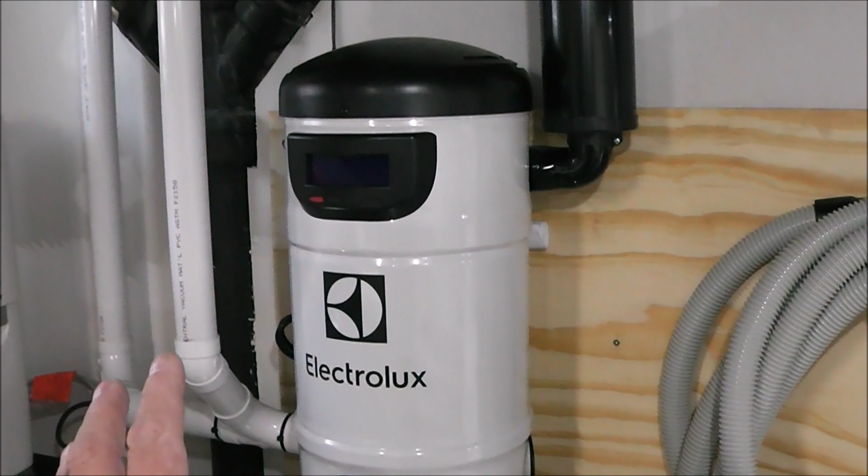laundry room. So what I've done is our vacuum cleaner just crapped out, so I just installed this last week, and what that prompted me to do is I had to drywall this wall here, and I also drywalled this wall here. So things are kind of torn up in here right now, but let me show you what we're going to be working on and what this has prompted this project to do.

So this countertop right here came out of my mom's house. It used to be a center island bar countertop. I want to build a rolling work surface, or like a work table, that my wife can use to fold laundry, and she can also use it to do her crafts. And I've got some drawers that I picked up from a college that I did some work at. Let me show you those.

Here are the drawers. You can see I got a few of them. I got some junk out here I've been bringing out too from doing the drywall. Look at the drawer construction. So they're constructed well, and I believe it's going to be a maple hardwood. So yeah, I think this will be kind of neat and it'll look good.

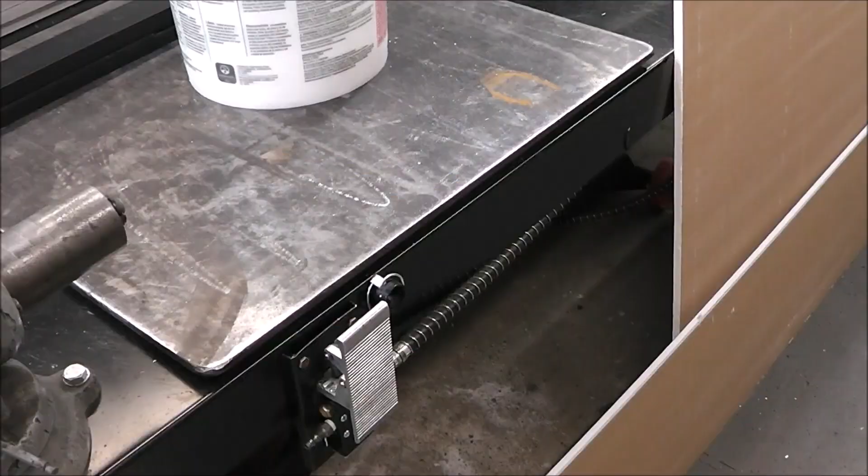So I think I'll put maybe a row of 3 drawers across the front, and it'll have a metal frame. So I'll probably make the work surface about the height of my table here. We're gonna have to make it so that it is not wider than this opening here. That way, if we ever had to get that out of that room, we could take the top off and just wheel everything through.

So now that you guys kind of got an idea of what we're building and how we're going to build it, now I want to show you how I arrive at how I'm going to go about it. If this part doesn't interest you, just go ahead and skip ahead to when you see me cutting or welding or whatever. But for some of you guys that want to know the thought process of where to start building it, this is what I'm going to talk about here.

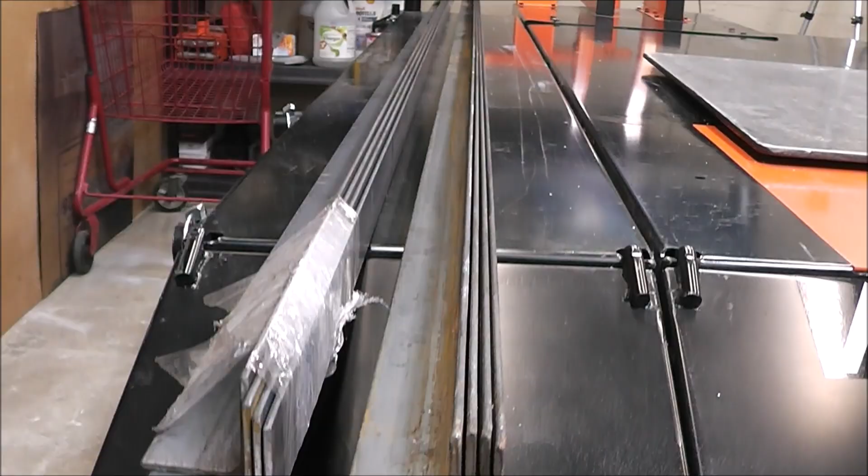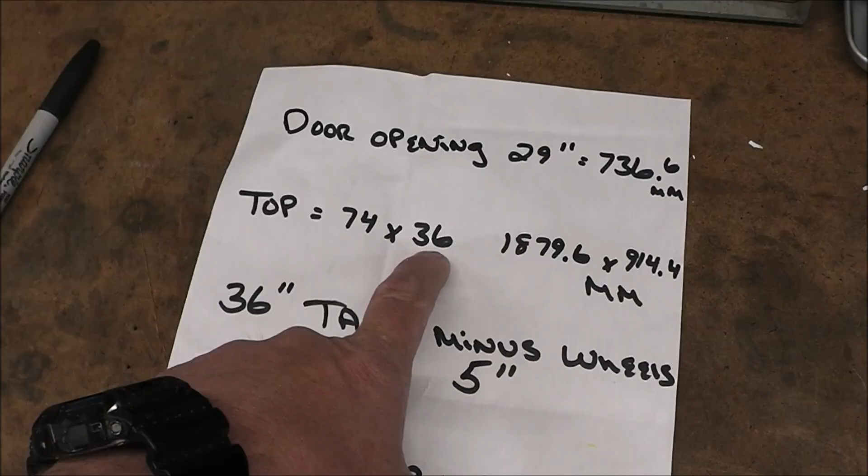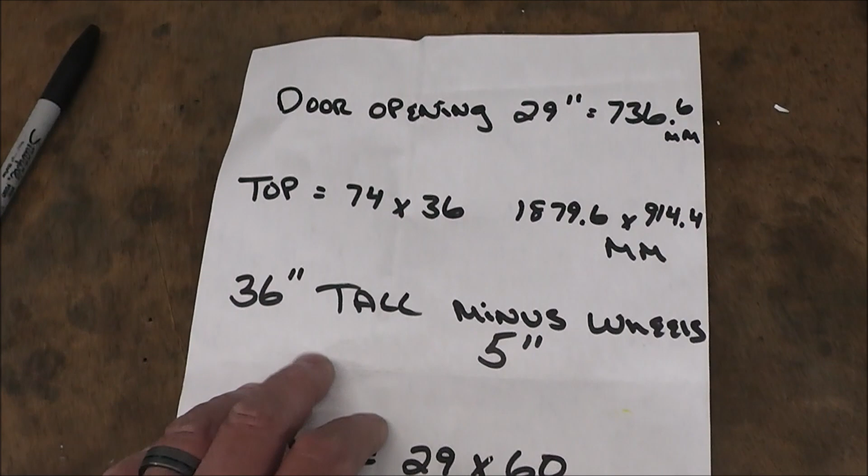This is what we're going to be building our frame out of. It is 1.5 inch angle, and it's 1/8 inch thick. This material comes from the factory in 20-foot lengths, but so it's easier to transport, I have them chop this in half. So my top is 36 inches wide, but my metal frame below it is going to be 29. So overall, that's a difference of 7 inches, which means I'm going to have an overhang of 3.5 inches on each side. Now that covers our width, but for length, I'm going to do 60 inches.

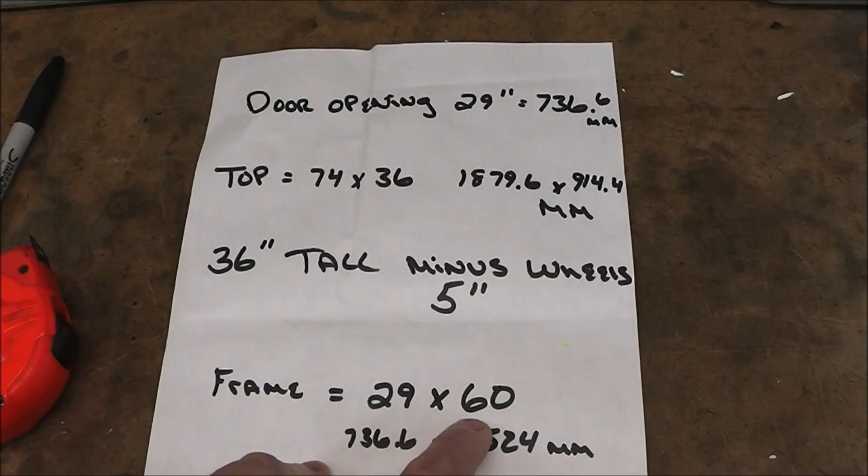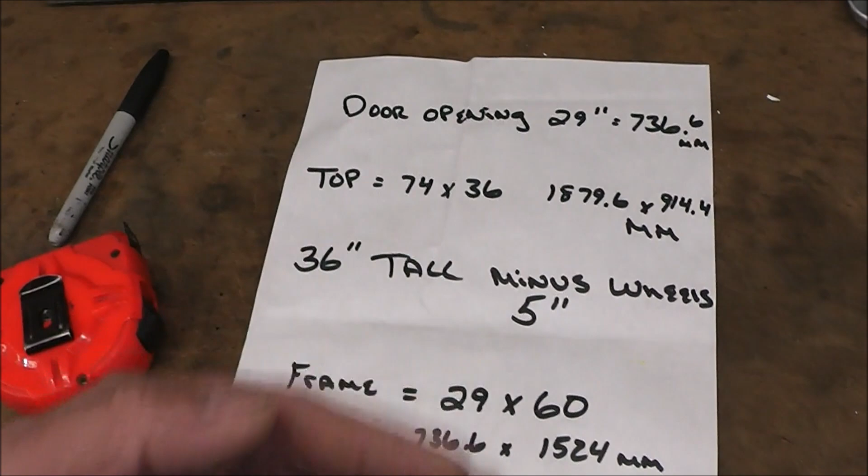Why'd I go with 60 and not that 7-inch difference? I'll show you. Each of these pieces are 10 feet long, so half of that is 5 feet. 5 feet is also 60 inches. So it'll just minimize the amount of waste. And that'll give me overall, from 74 to 60, 14 inches. And I might put that 14 inches all on one side, so it's hung over, so you could pull a stool up to it, and your legs would go right up underneath it without bumping. So our frame we're going to build at 29 by 60.

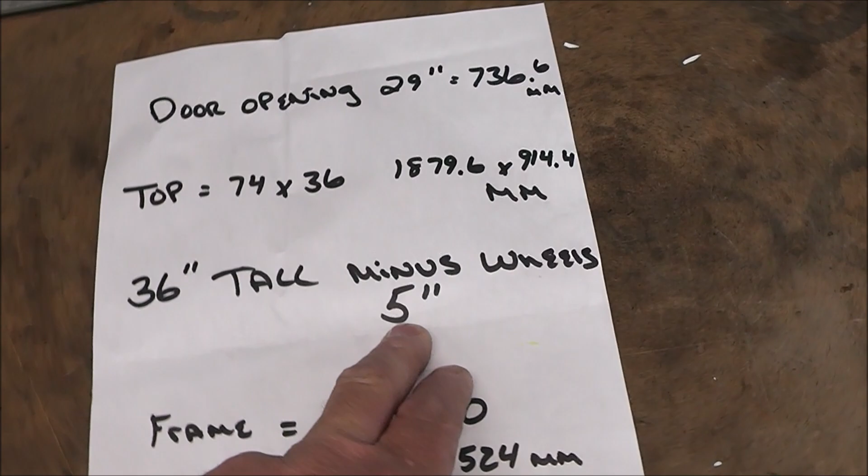I want it 36 inches tall off the floor, but we also got to subtract for our wheels, which is about 5 inches. And you can see that's what I have over here on this workbench. I've just got all wheels, I can roll it around. Those measure 5 inches. So that adds another 5 inches to your height. Then the next thing I do is draw myself out a little sketch. That way I can visually see what I'm building and how many pieces I need to build.

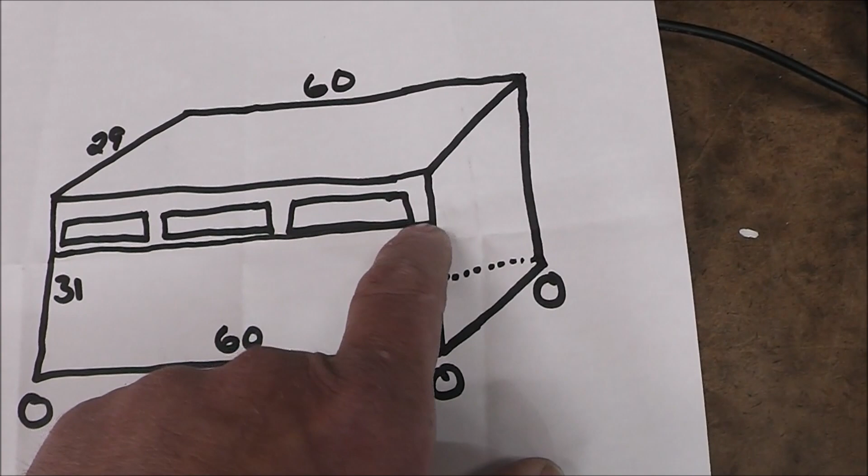So these simulate the drawers that we talked about, and it's also going to need a piece coming across underneath the drawers. Recognize this right here? That is those drawers that I was just showing you. So I use this all the time. You can see this is my catch-all. This is where I'll keep all my supplies.

We'll start right off. I know I need 1, 2, 3, 4, that's the back one, plus 1 under here, so there's 5. So we'll cut 5 at 60 right off. Taking just a few extra minutes in the very beginning to lay things out and plan it out like this is going to save you a little bit of money on the other end too, because you're not going to have as much waste. If you have a bunch of 1-foot pieces left over, you're probably not going to have a whole lot of use for that. So I tried to maximize the material that I have and minimize the number of cuts.

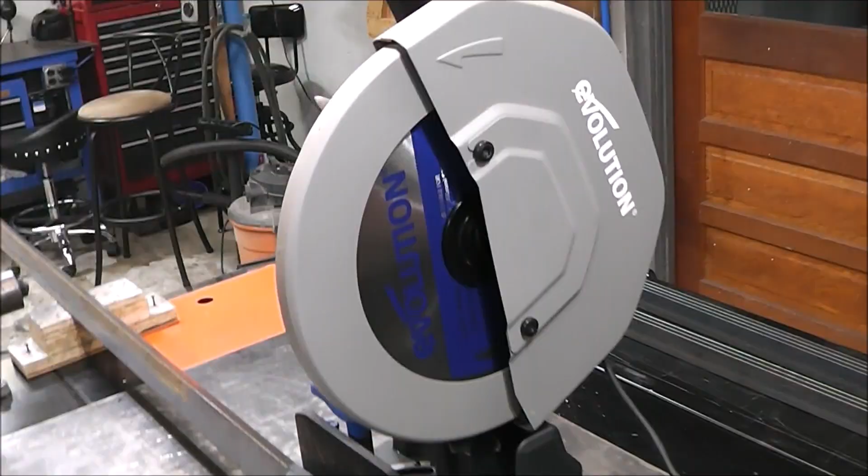So let's get going. For this, I'm going to be using my 15-inch Evolution. It is model S380 CPS. I know you guys always ask, so I wanted to show it to you.

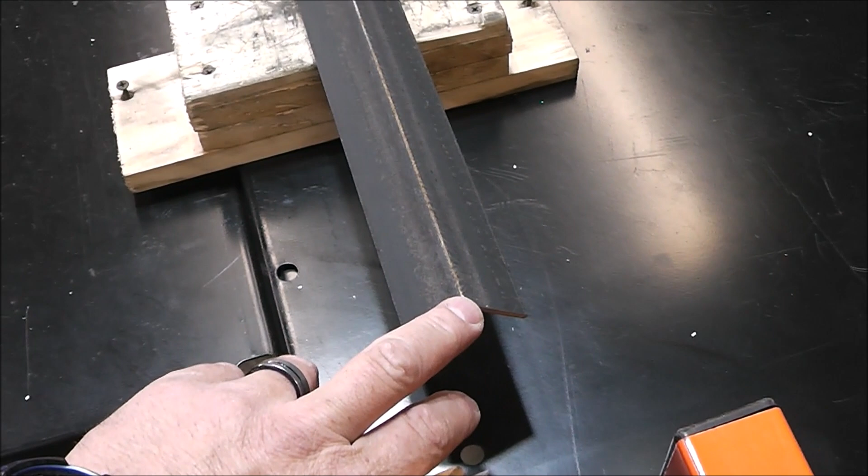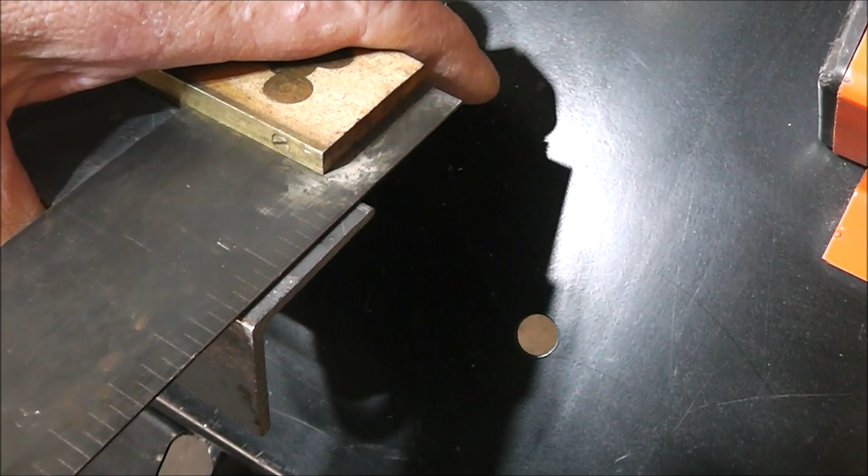But the one little tip, now remember I said they cut these to 10 feet. They originally come in a 20-foot length, this size. So don't take for granted that because the metal shop cut it for you, that they actually did a good job. You want to verify that. I've actually seen where the metal shop cuts it and the cut is crooked. So here they did a good job, but you don't want to take it for granted, measure out your stuff, make your cut, and then realize that they had made a crooked cut on this end. Now your piece won't be long enough. So just double check everything before you start. It'll save you a lot of aggravation potentially in the end.

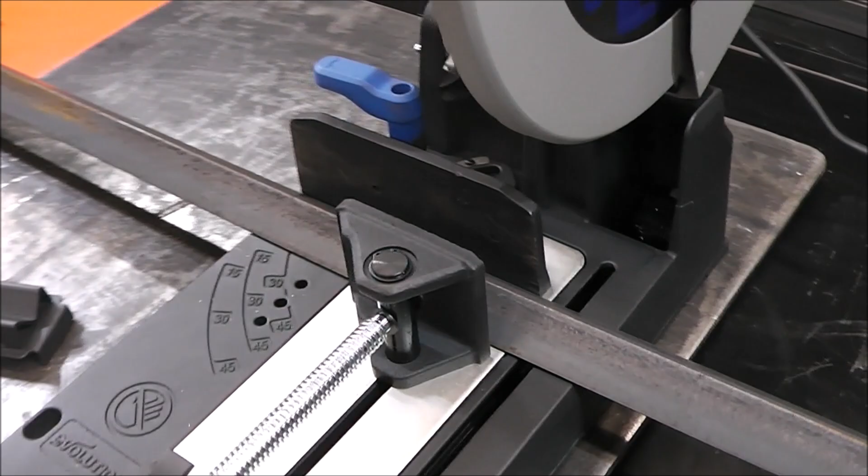I personally like to use these silver streaks. They didn't have these when I started metal fabrication. All we used was a soapstone, but these make it real nice because it works like a mechanical pencil. You pull this cap off on the end, you can spin it around, sharpen your pencil. It just works really good.

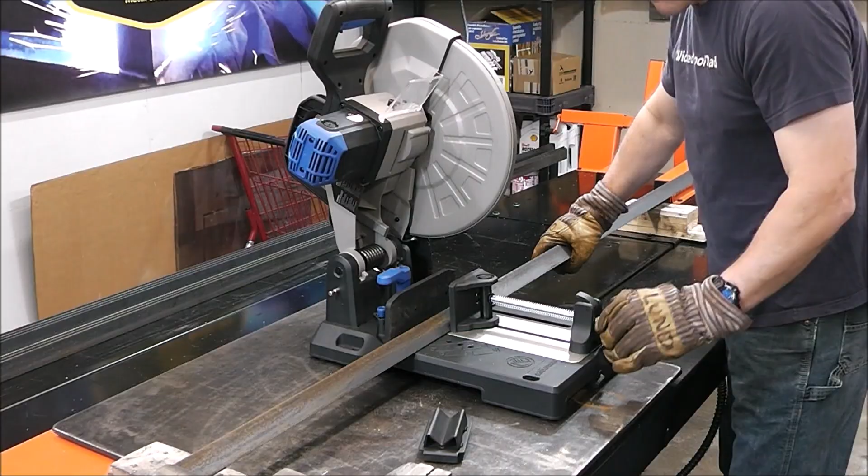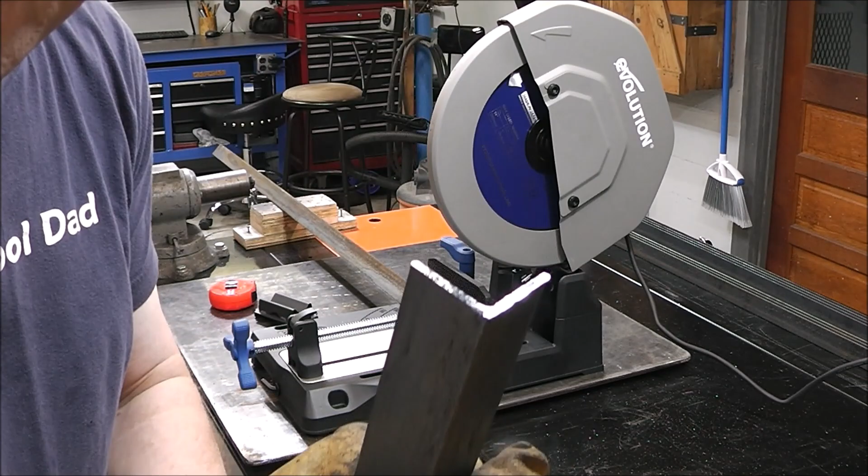And check that out, guys. Burr free. No heat in it whatsoever. That's why I love this tool so much. And now without moving anything, we can come right over to this side and measure out 5 feet or 60 inches again. That easy. Loosen up our clamp, slide it over, check it to make sure that our blade is going to just cut right at that line, snug her down. That easy.

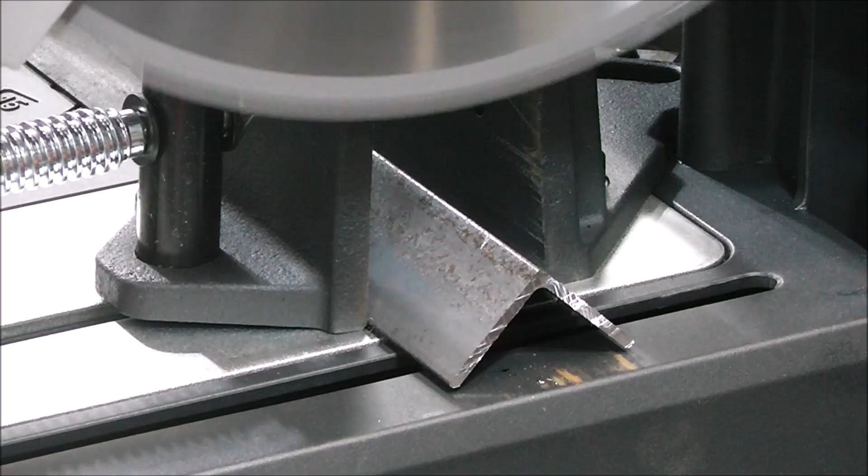Check that out, guys. That's fresh off the saw and I grabbed it by hand. If you cut this with a grinder and a cutoff wheel, you wouldn't be able to do that. So that's the great part about this saw. Not only does it do a nice clean cut, it keeps the material cool. You don't have hot molten sparks flying through your shop and you lessen the chance of burning down your workshop. How you put the material in this saw actually matters as far as longevity of your blade.

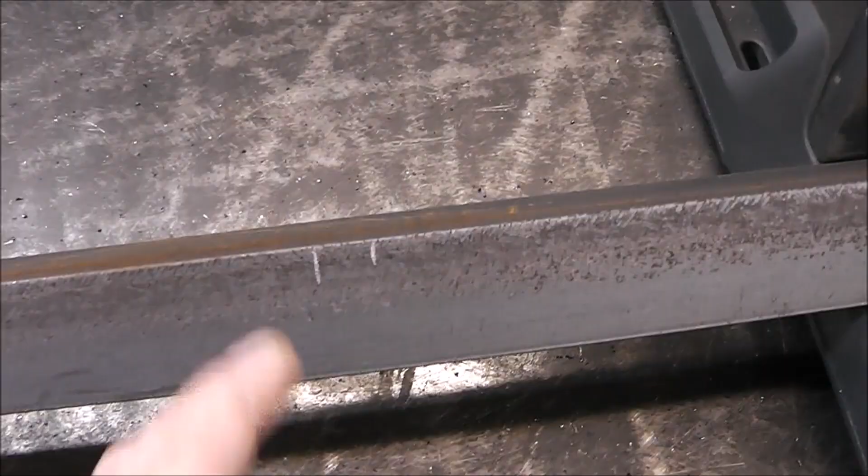So you can see my little marks right here. So from that mark it's 60 inches that way, and from that mark it's 60 inches that way. So the piece right here, that's the scrap. I'll give you a close-up on how I set that up.

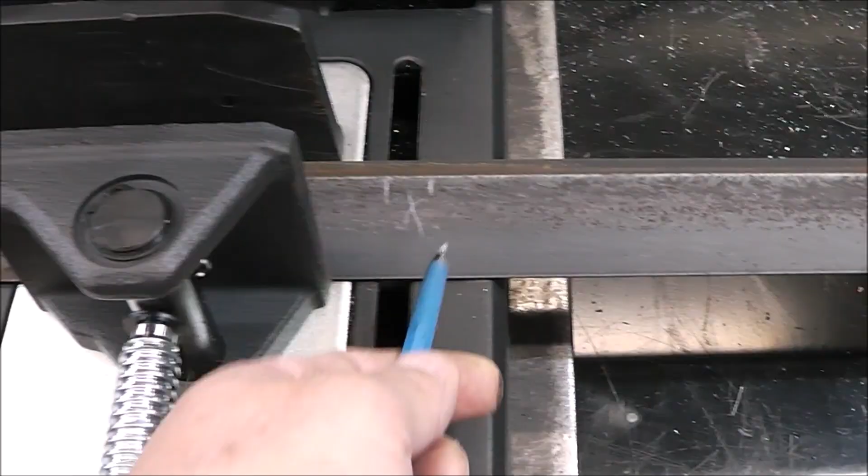Now you have to account for the kerf of the blade. Remember, this is the piece I'm keeping, so the blade needs to be on this side of the line, not that side of the line. So I want to keep just a little bit of this white line showing on that piece. Right there, that's what we want. Looking right down that blade, you see how we can just see that line? That's what we want.

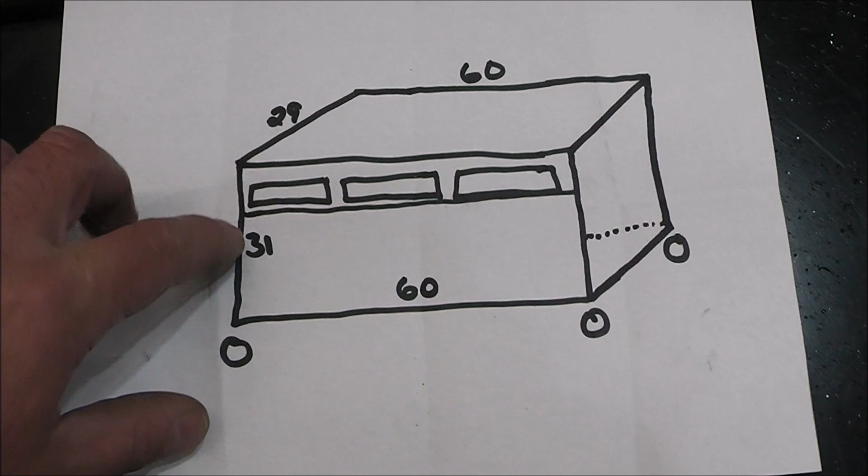So we got the 60s done. So now we need to work on the 31s. That's the height. So we got 1, 2.

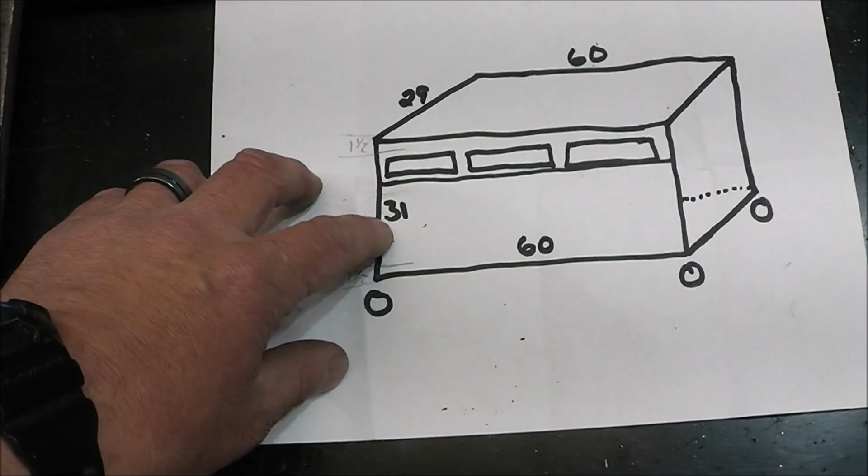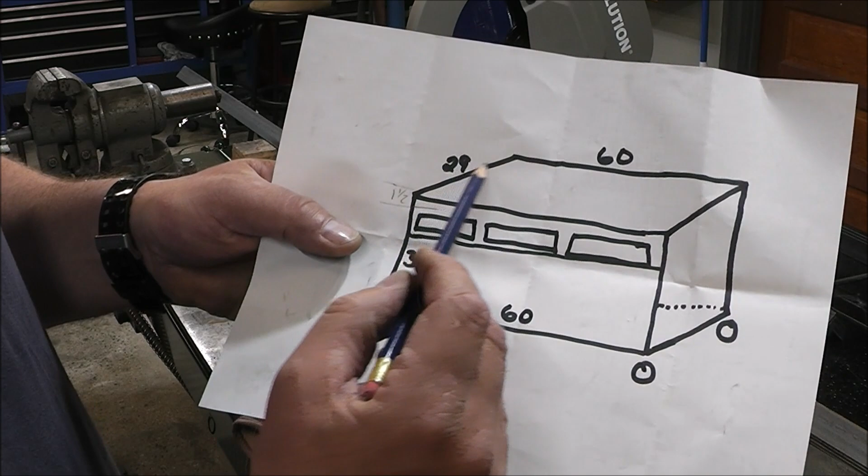That's what life's about. And now I'm going to be putting on the legs, and I'm going to build them the same way. I'm going to run the corner piece right up inside so it overhangs it, and then for the inside I'll run it to the inside, something like that. So we're going to want to make this piece 31 inches. So now I got all 4 of those cut, and now I'm going to start cutting the 29. We're going to need one there, there, and there. So we need 4 of those.

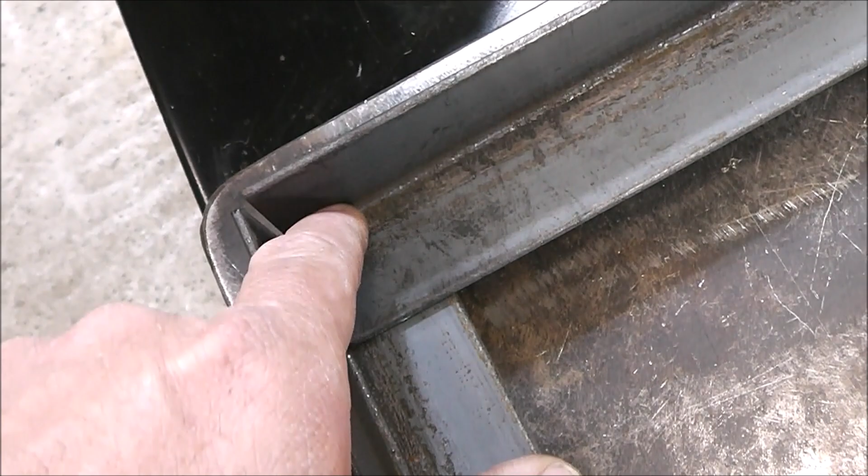So I've got our rough shape laid out. That's our 29, that's our 60. And now we're going to start putting this together and get ready to weld. Now, you can just clamp it together, right tight in the corner, weld it right here, here, and then come up. But you can see that leaves a little bit of a gap there. We could fill that, no problem, but it also gives me an opportunity to show you how to cope out the corners. It's called coping them out. Doesn't mean you have to do it for this, but I figured I'd show you another way of doing something. So I've got this piece lined up in the corner where it needs to be.

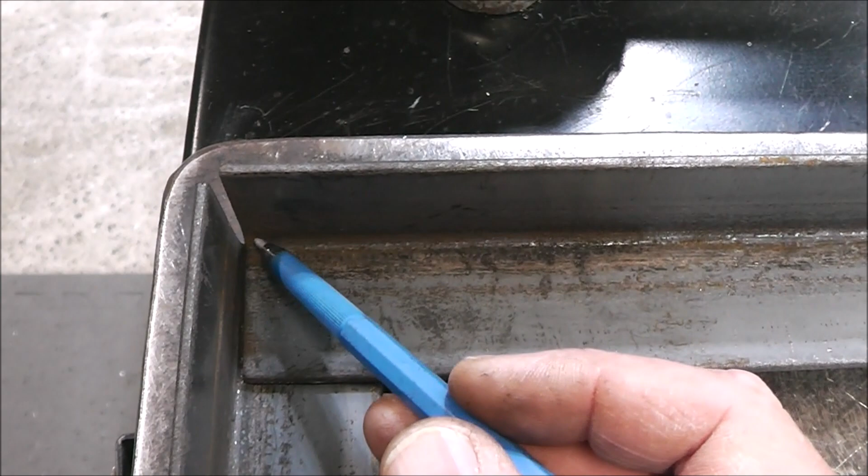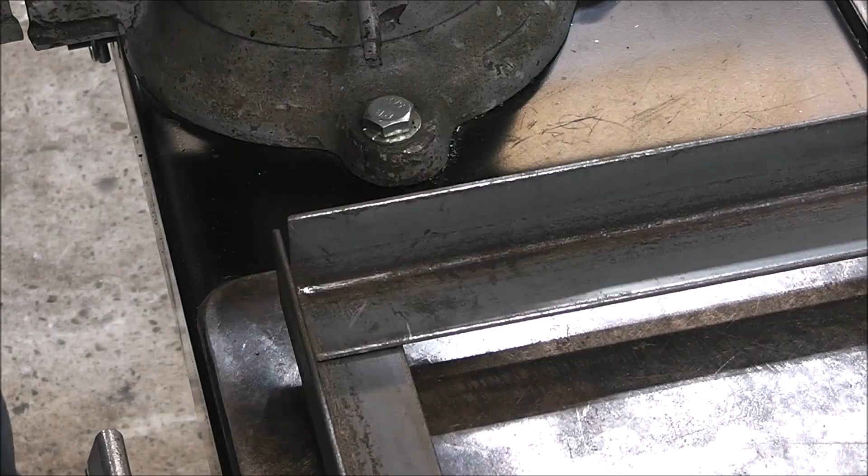This piece needs to come out. So it needs to have a line up here and then over, and this little square piece has to come out, and we're going to do that with an angle grinder. And to get that straight line, you can use pretty much any type of framing square, metal square, whatever trips your trigger, whatever gets you a straight line.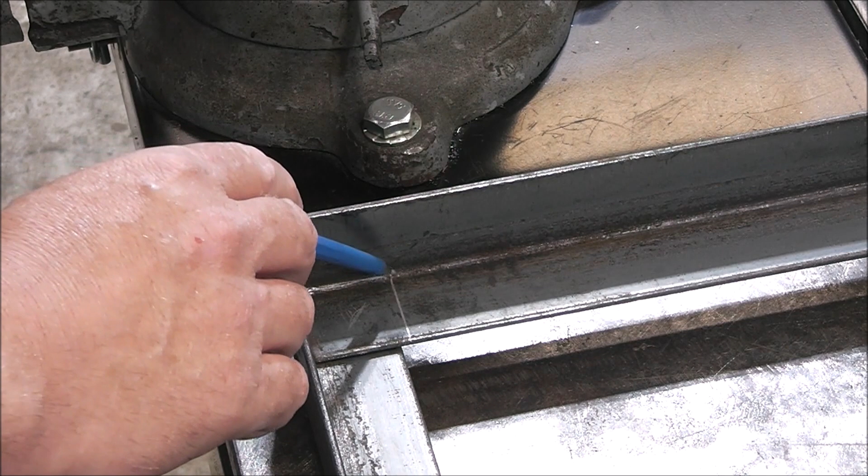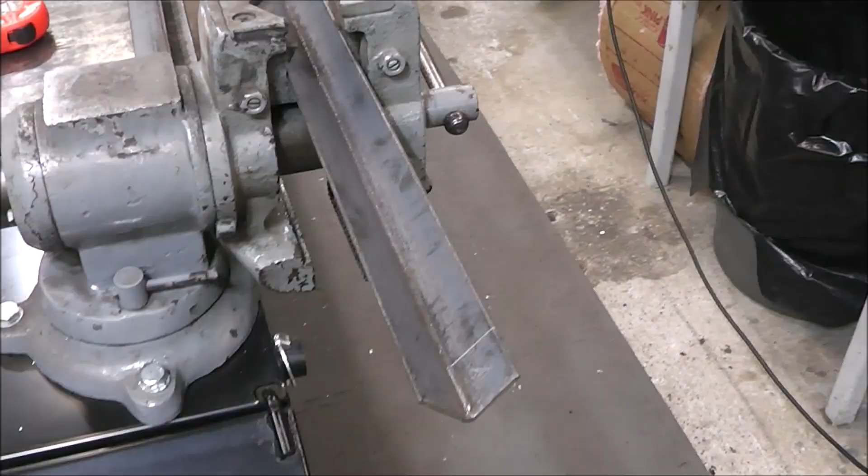And then we'll cut that out. You can even do that with a plasma cutter if you wanted. And we'll have to do that here, here, there, and there. So you'll have to do that 4 times, and then this will fit up nice. So I've got this chucked up into my vise so I can get to it real good. And you can see I got it all marked out.

And I'm going to use this right here, which is a metal cutting diamond cutoff disc.

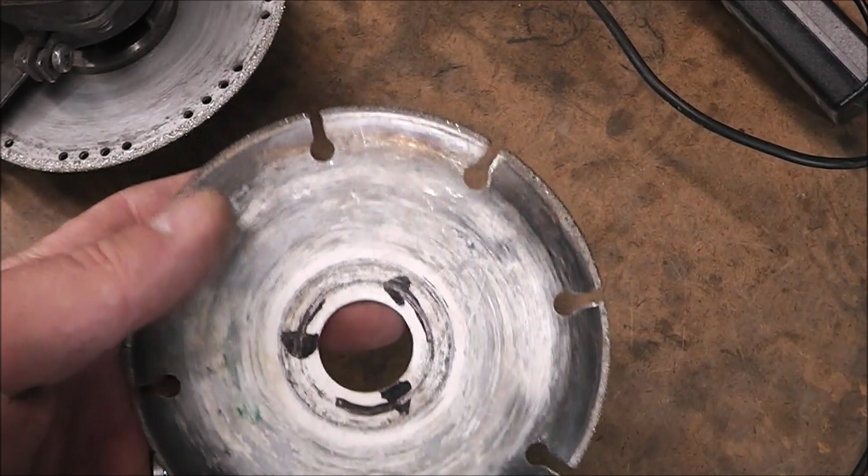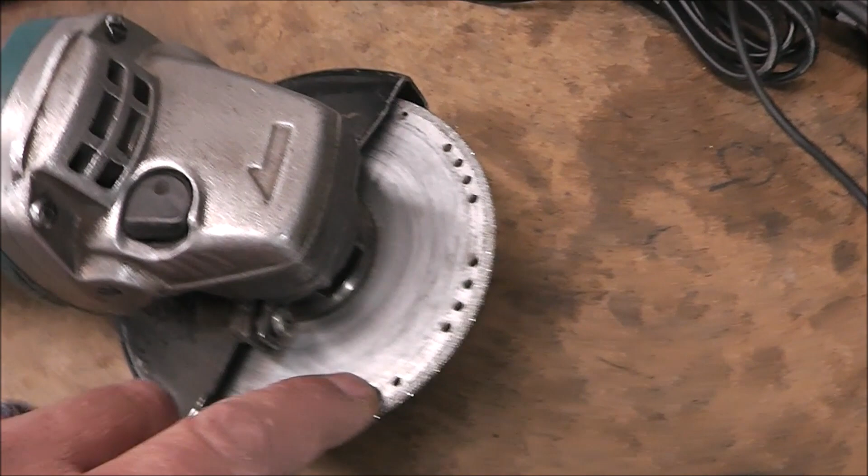But I really like this tool as opposed to this type of diamond cutoff wheel. And the reason for that is a lot of people claim that these are jumpy. And the reason these are jumpy is because they have these segments in between. These segments keep the blade cool. Well, this one is a continuous rim with just a few cooling holes along the way. I really like this one better because it's just smoother and easier to use. So that's my choice of tool for cutting out these copes or notches.

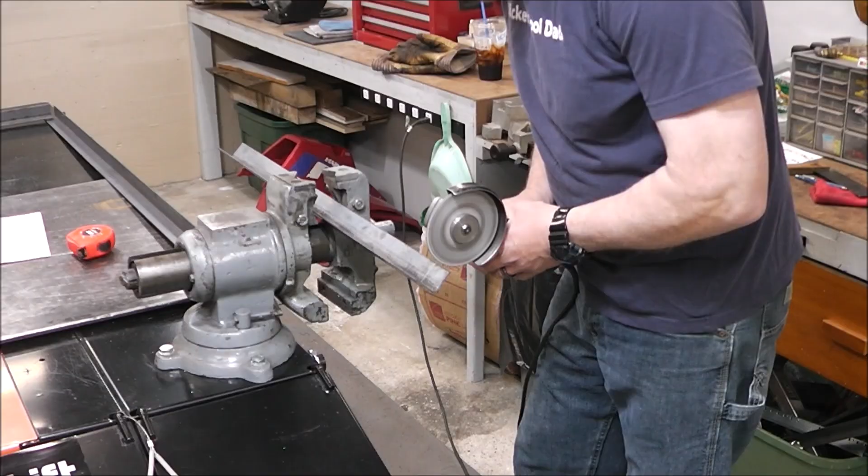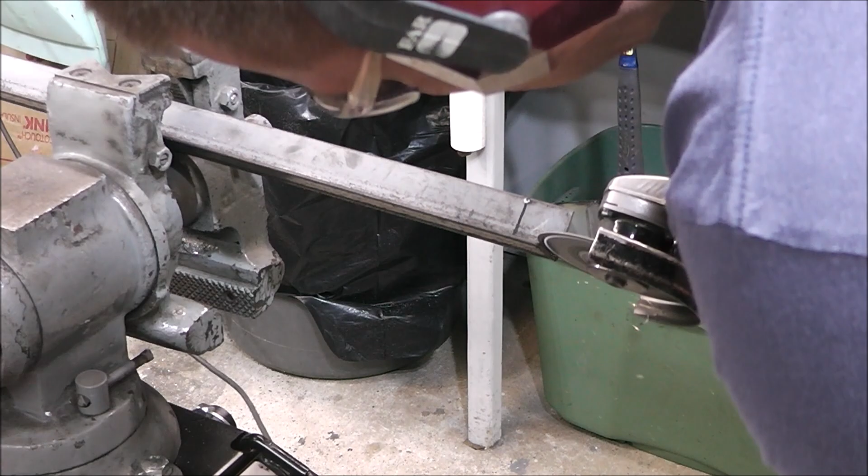Not too shabby, huh? Yeah, and that is our coped out joint. I'll show you how that fits. Yeah, just like that. Now you can see how that's flush all the way around. Weld that up. Be real easy to make that look nice.

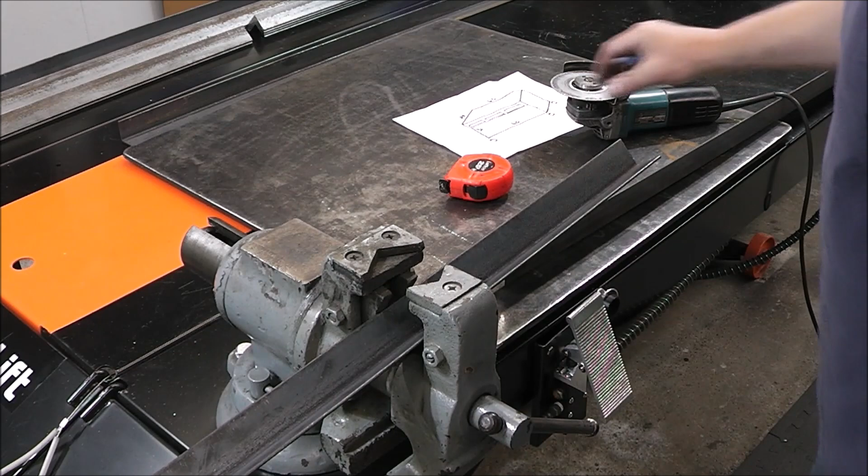So. Another easy way to lay these out is to just come back 1.5 inches. This is 1.5 inch angle iron. You don't really need to know anything else other than just come back 1.5 inches, and that's the piece you take out. It's that simple. Always double check your measurements. It's a lot easier to measure twice and cut once than it is to add back on.

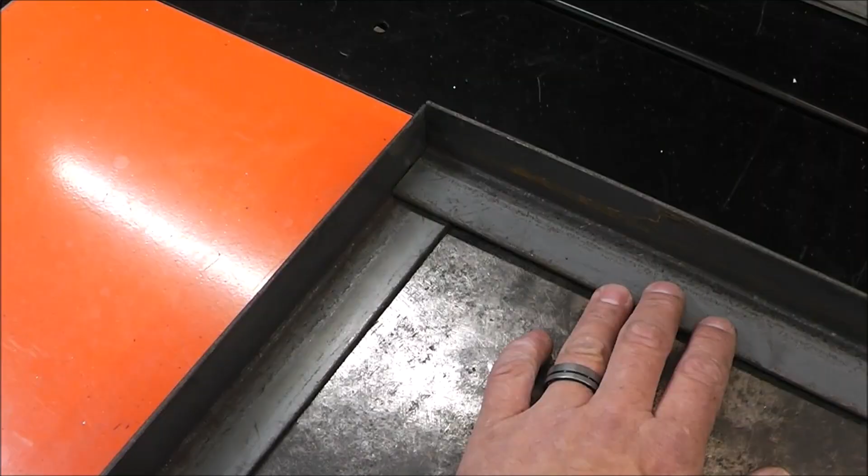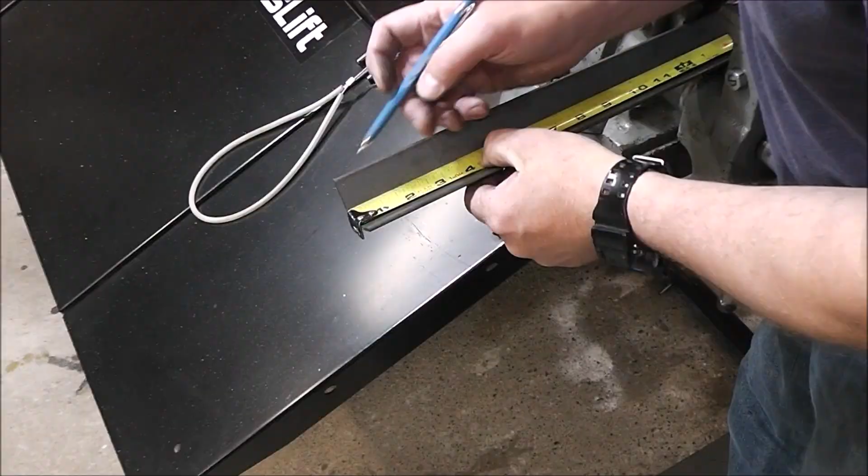So I got that side all notched out. Now I just got to do this side. Piece of cake. You know, this doesn't have to be a laundry room cart either, guys. You know what I mean? This just happens to be like a laundry cart craft table for my wife. But you guys could use this for a rolling workbench or whatever it is you wanted to do with it, you know. This is another good beginner welding project also to take on.

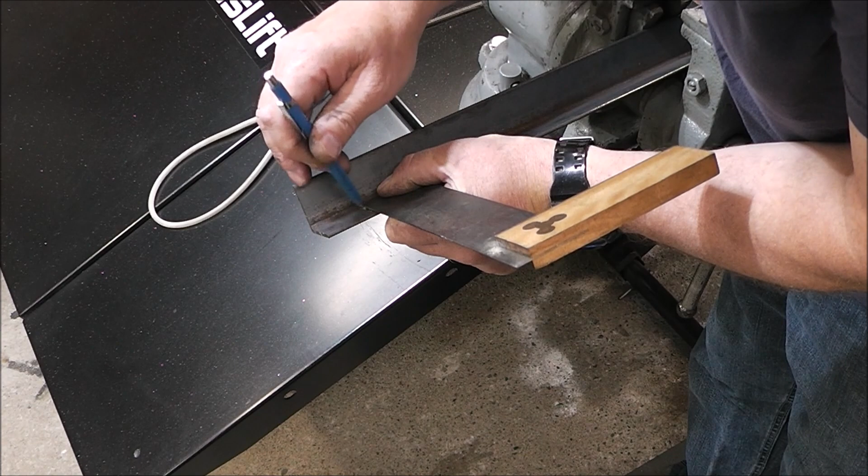If you guys don't have a workbench, this would be a great project to take on because, you know, if you got a bad weld on it, probably not going to hurt anybody. It's going to be in your workshop, so you'll probably be okay. We all need a good workbench, and this would be a nice workbench to build.

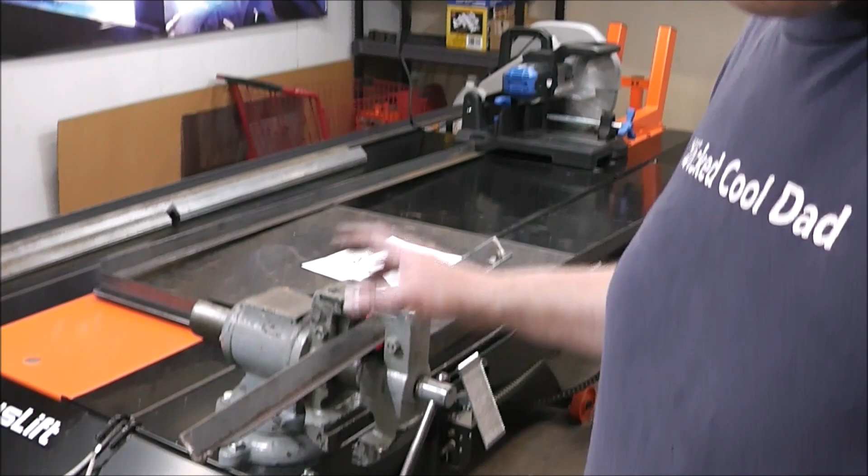Another great thing about those cutting discs is you don't have all that abrasive dust that you get off an abrasive wheel all through your workshop. You're not breathing in that garbage. That stuff is nasty. So it's also a lot cleaner in your workshop. You don't have that stuff to deal with. Now I'm just going to take it over to the bench grinder, clean up this a little bit, and we'll be done.

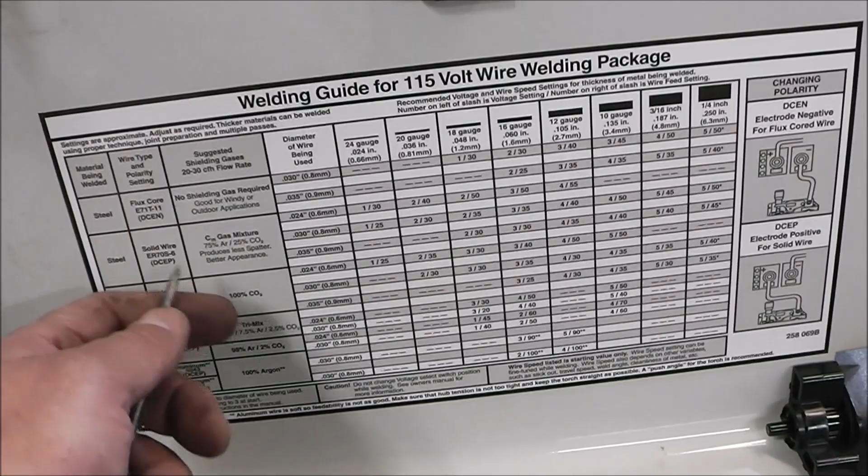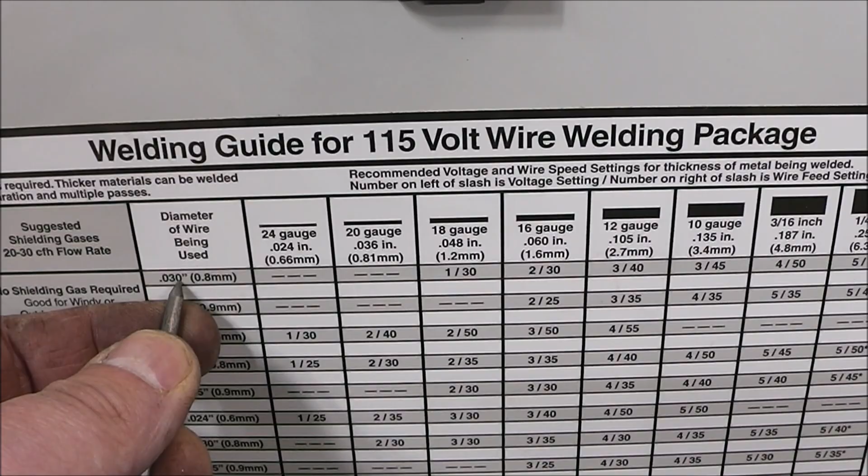To weld this up, I'm going to be using my Hobart Handler 140. And to set this up, we're just going to go to the chart on the inside of the door. Right now I'm using 30 thousandths flux core wire. And we are welding steel. We are using flux core, no shielding gas required, 30 thousandths wire. And we are at 1/8 of an inch metal is what we're using.

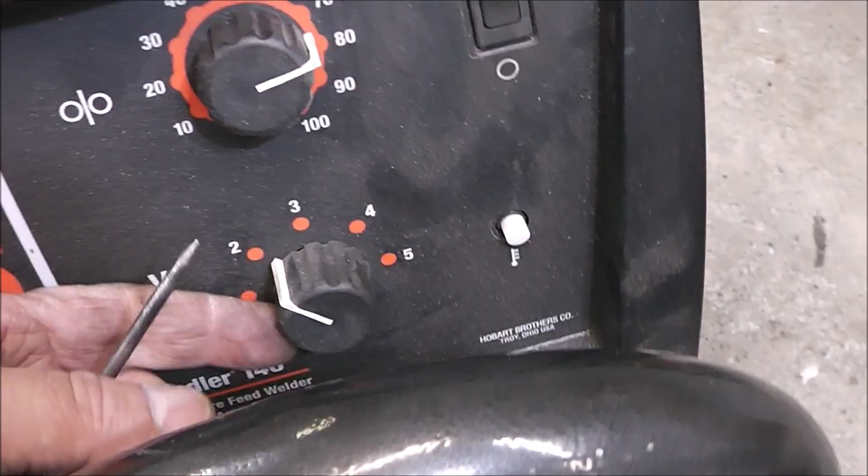And if we look at our handy material thickness gauge, we'll see that 1/8 of an inch is roughly 125 thousandths. Going back to our chart, we will see that 105 thousandths and 135, it's right in between that. So 3 and 40 or 3 and 45. So we're going to run right around 3 and 45, right in that general vicinity. We'll set this for 3. Put this back to right around 40, 45, right around there. And that'll be a good starting point.

Now, I wanted to point out just a couple technical, minute things when you reference this stuff. So you have MIG welder, which is referring to a bare wire with a gas. Okay, so that's MIG. Then you have flux core, which is using flux core wire, and it doesn't require gas. You can also do what's called dual shield, which is when you use a flux core wire and you do gas with it. Well, we're not doing that. That's on structural jobs, you'll see that. But for our general purposes here, we're either using MIG, which is a bare wire with gas, or flux core, which is self-shielded wire.

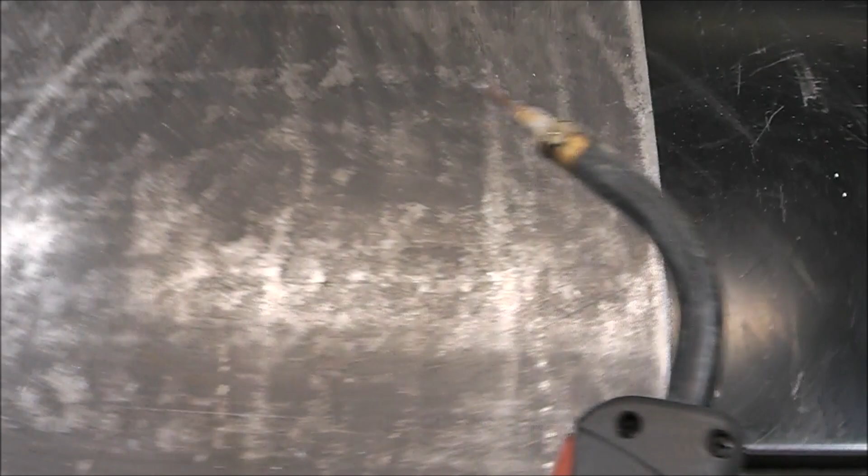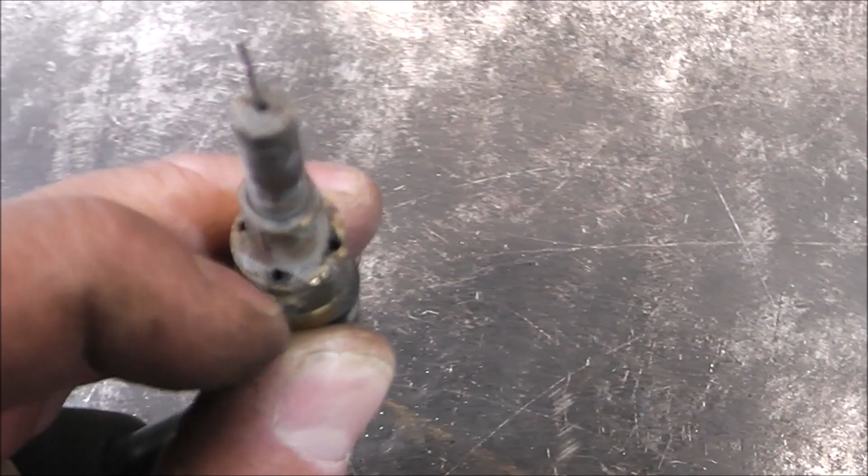I get asked a lot why I don't use a nozzle on the end of this. When you MIG weld, you would have that on the end, and what this does is inside here, you see these little tiny holes? Inside there, that's where the gas, the shielding gas, comes out from.

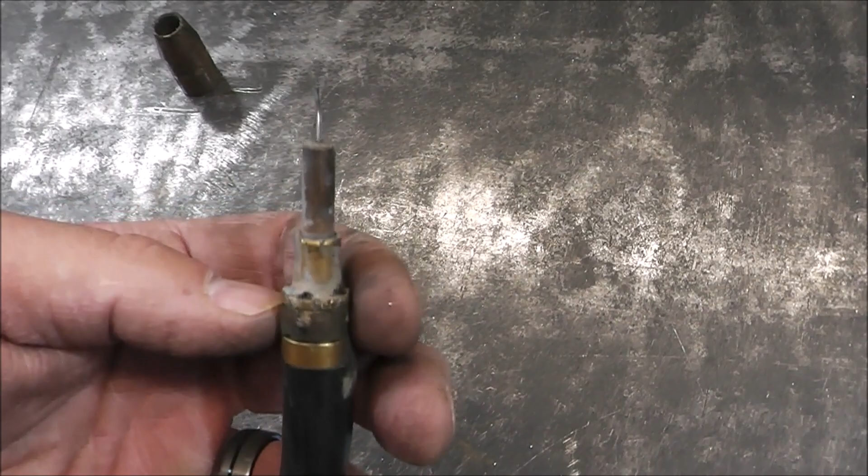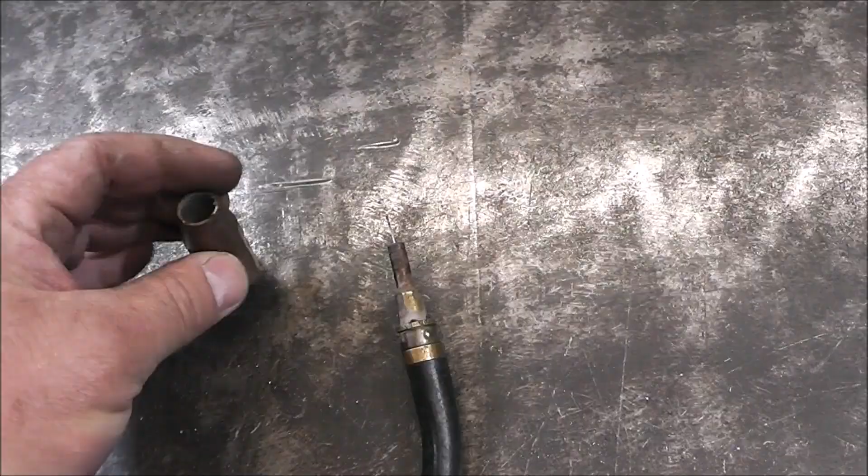This nozzle on the end is what directs the gas out the tip to shield your weld puddle. Well, flux core is self-shielded, so they make a piece that slips on here. It's like a heat-resistant plastic that goes on over this. Its only purpose is to keep you from touching any of this stuff to your metal, because when you pull the trigger on the gun, this will become energized. It wouldn't normally be energized because you would have this over it, but when you take it off, this becomes electrified. So you just have to be careful that you don't touch any part of this onto your workpiece if you're going to do this.

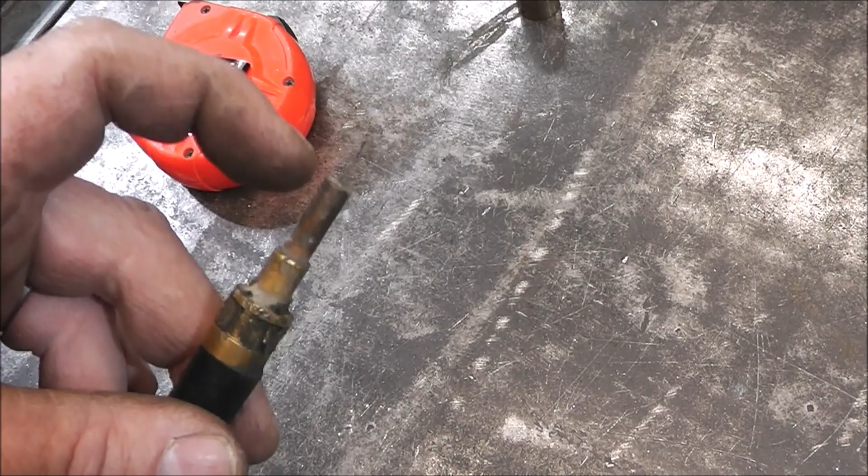I don't run a nozzle for flux core when I do flux core welding because I like the ability to be able to see real good. You just make sure you don't touch that to the metal and you'll be all set. A rule of thumb when you put stuff together is you never fully weld it. Just tack weld until you know you got everything perfect.

There, that's nice. Now it does make a difference on which polarity you use, if you're using bare MIG wire or you're using self-shielded flux core wire. So read your machine's manual, because a lot of machines have ended up on Facebook Marketplace or Craigslist because the person didn't have it wired up right and they thought their welder was bad, or they thought they weren't a good welder and they couldn't figure it out. So, just doing small tacks.

If it really matters and it's mission critical, you can run a tape measure corner to corner this way and then corner to corner the other way and make sure the measurements are the exact same. For us, the measurements are just about perfect and close enough.

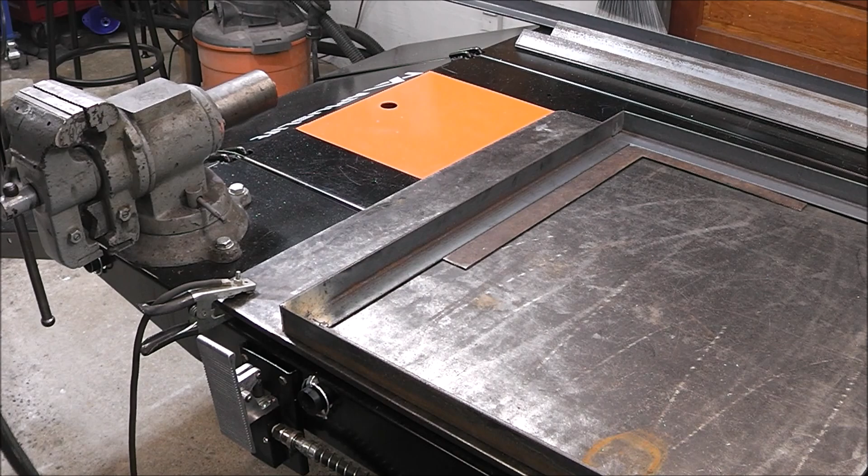It's starting to get a little bit smoky in here. I'm going to turn on my $60 DIY welding fume extractor. If you haven't seen that video, I'll put a link up above. But yeah, it works really good pulling fumes out of the workshop. Hold it right over the work that you're doing, the smoke comes right up and right outside.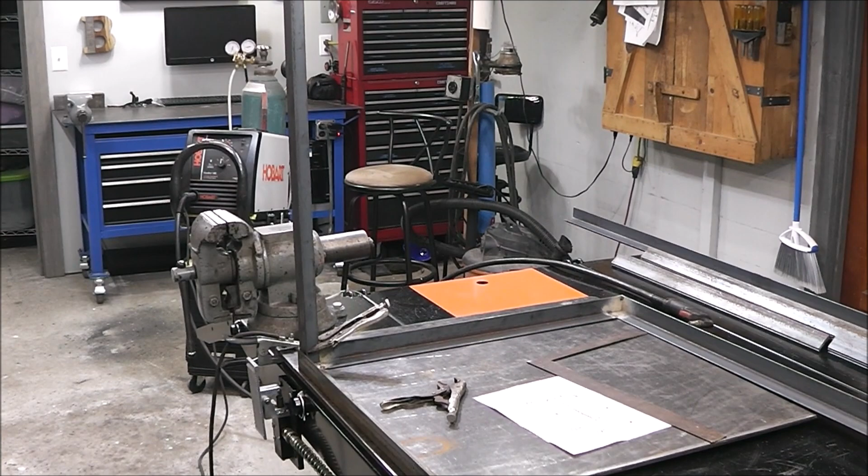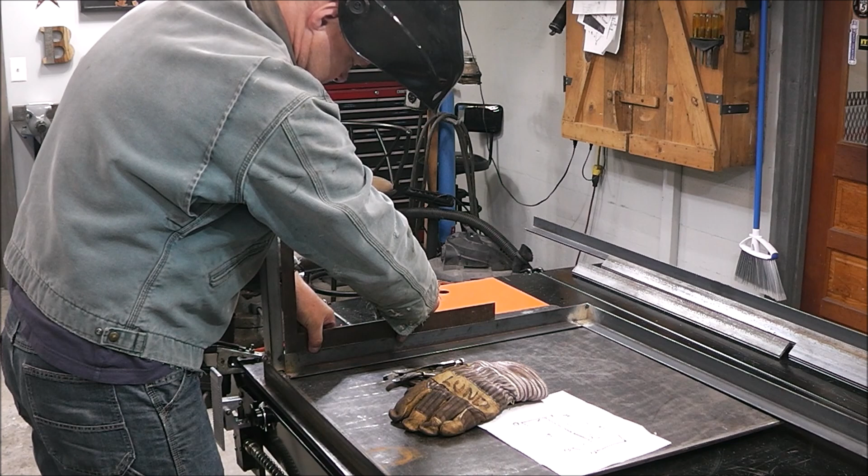Now the next thing we got to start working on is we got to get the legs on it. So we'll tack those on and get those into place. Nice and square. There we go. Do that 3 more times.

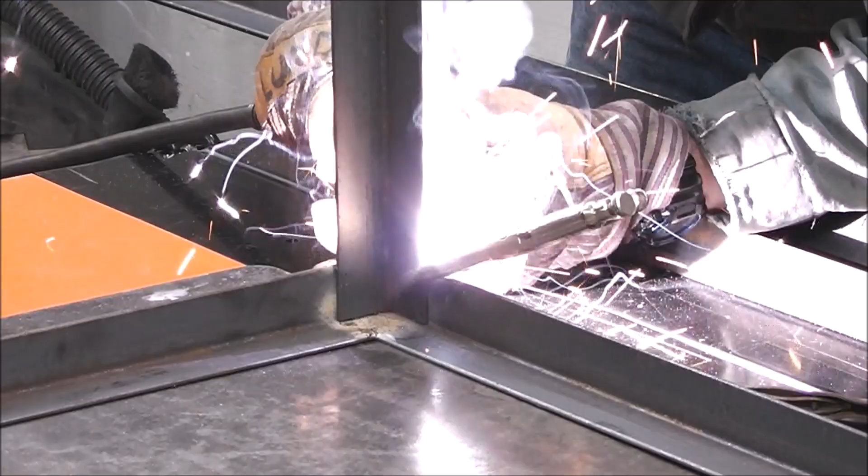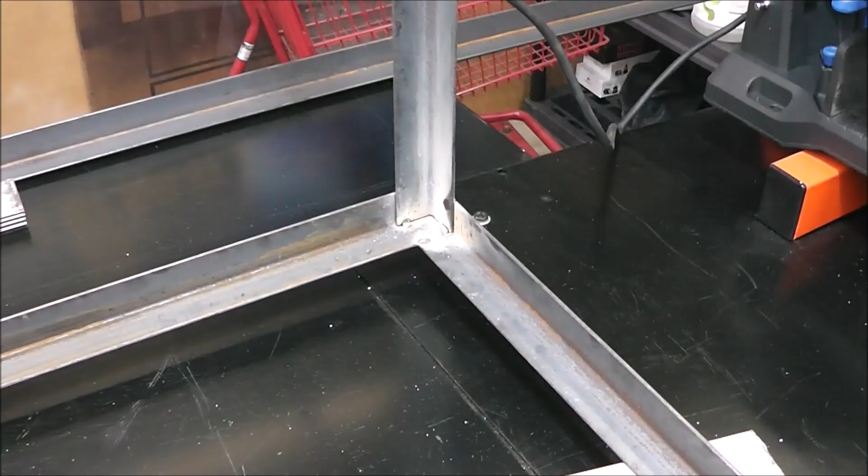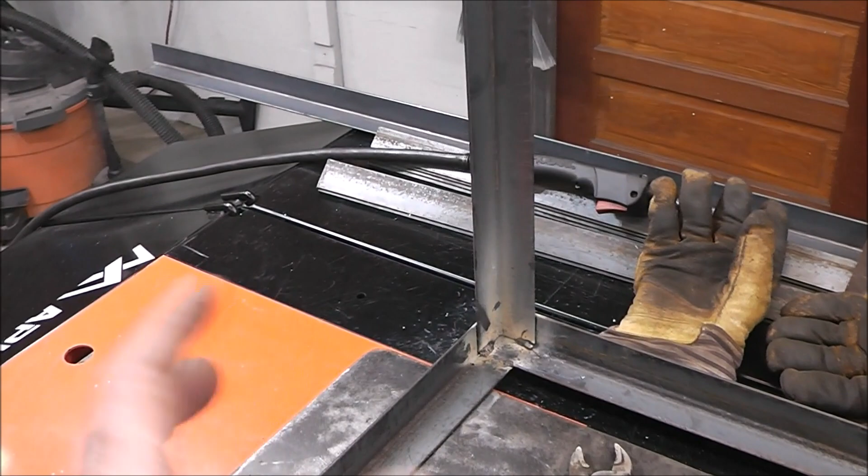So we got tacks on the inside. That keeps it from hinging. We got some little short welds on the outside. You know, when you weld too much, it tends to pull things around anyways. It's perfect now, but when I start welding, this thing's going to start pulling all around. So you're just going to have to kind of check it as you go.

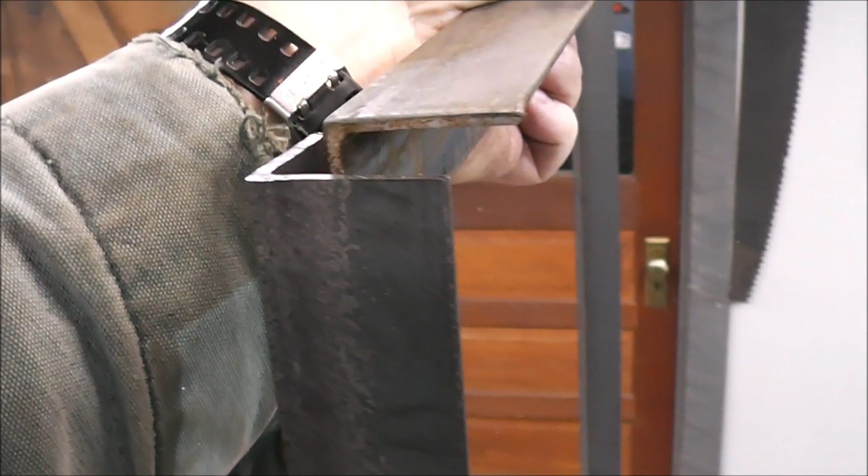And again, remember, we're working on the bottom, so I'm going to have these welded on just like this. So in order for that to work right, we're going to have to shorten them up. See how right there, trying to fit inside to inside? That's just not going to do it. So we got to take just a little bit off both of these so we can make that happen. We're going to have to take a little bit off these too, almost 1/4 of an inch. So let me do that right now and then we'll get it welded up.

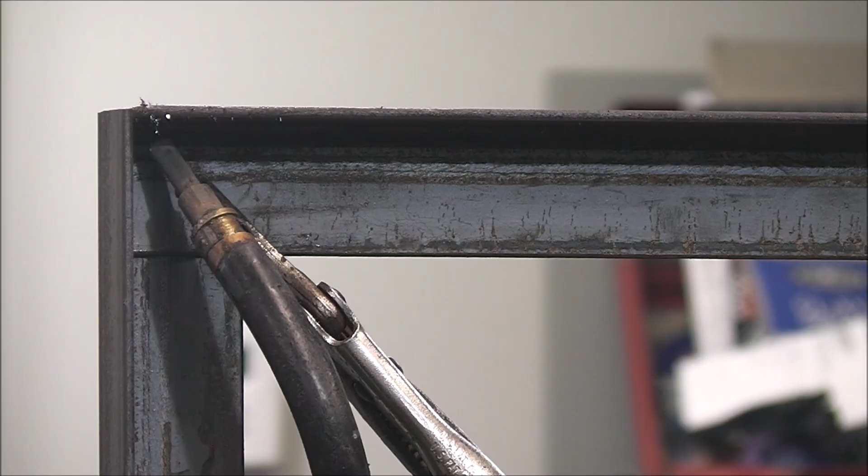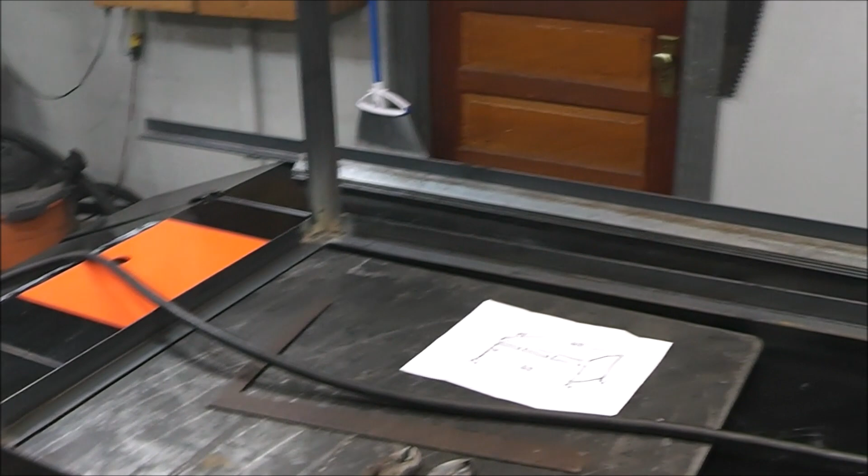We're gaining on it, guys. Now all I gotta do is put that spreader across there. Same thing on the back. And then we can check it, make sure it's all square. Then once it's all square, we can weld it all completely out, flip it over and start framing it for these drawers. This is gonna be a nice little unit.

And that's all there is to it, guys. I think we're gonna finish off right here. The video's already getting a little long. Come back next Friday. We'll finish all of this up. We'll get those drawers in it, we'll get a coat of paint on it, we'll get the top on it, get the wheels on it, get it all finished up. Got some storage ideas that could probably come in handy for you guys if you decide to make this into a rolling workbench or something like that.